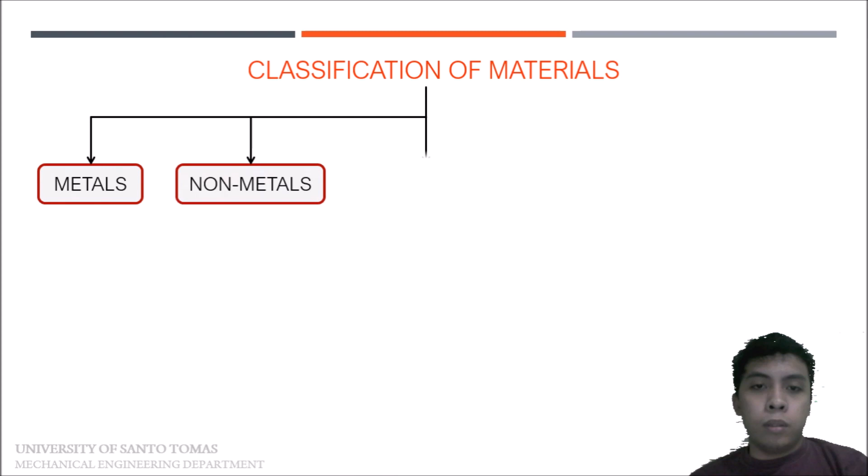So classification of materials. Classification of materials is categorized into five, which are metals, non-metals, ceramics, polymers, and composites. And the metal part is divided or classified into two, which are ferrous and non-ferrous metals. Polymers are categorized as well into three, which are thermoplastics, thermosets, and elastomers.

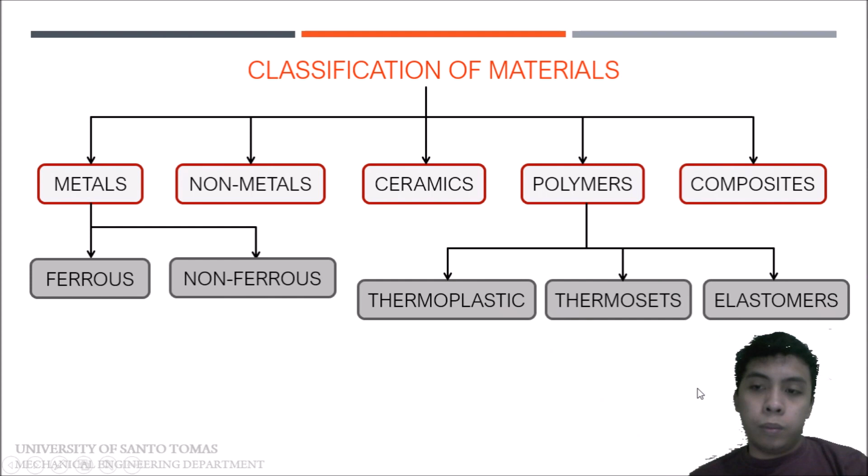Pag sinabi nating ferrous metals, it usually implies that iron is a large percentage of the elemental composition, which generally makes them vulnerable to rust when exposed to moisture. So kaya nga siya tinawag na ferrous kasi the majority element is Fe or iron.

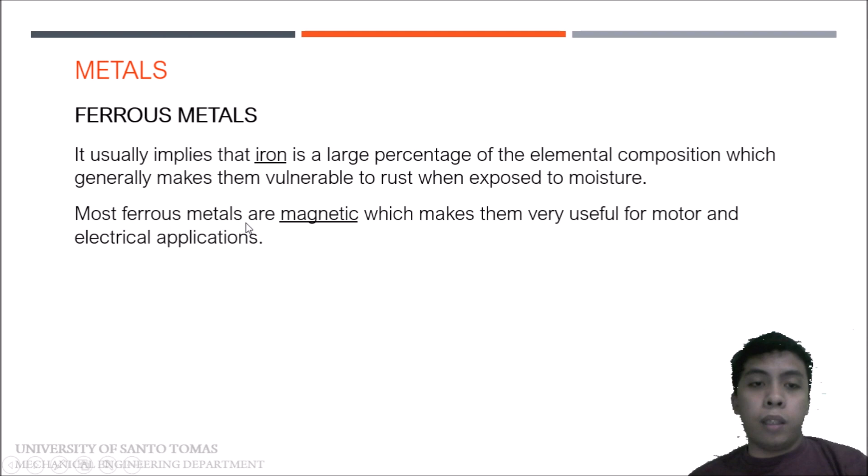So most ferrous metals are magnetic, which makes them very useful for motor and electrical applications. So examples of ferrous metals are alloy steel, stainless steel, cast iron, and wrought iron, all of which are ferrous metals. Majority ng compositions nila is iron.

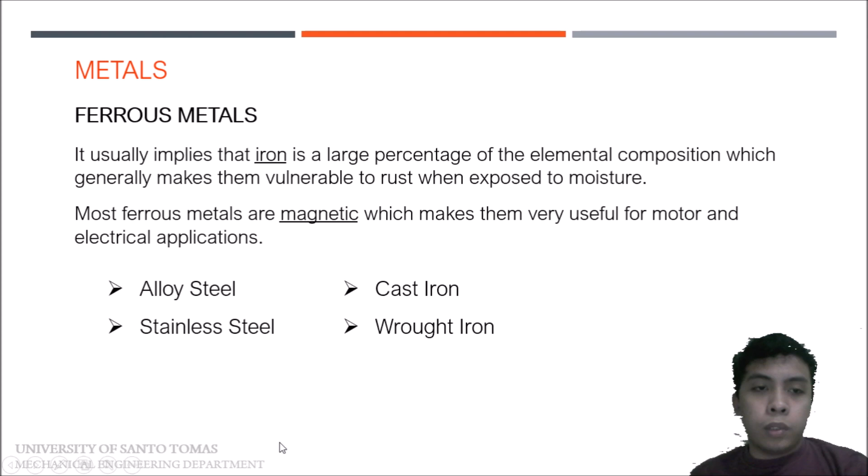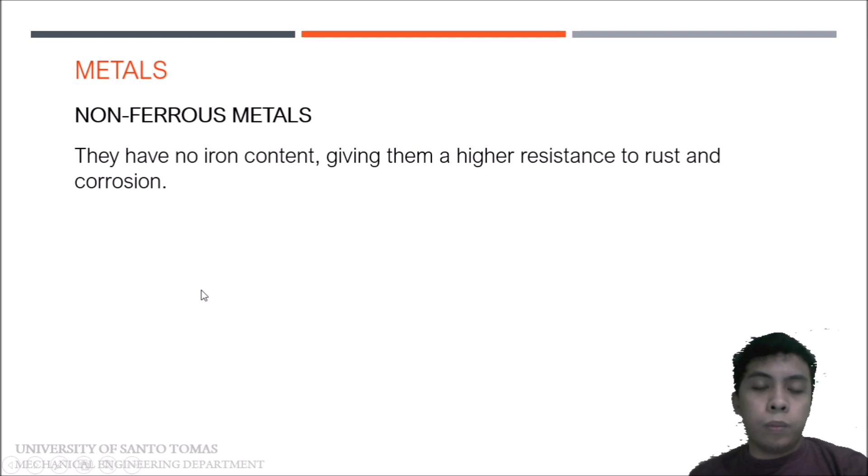Okay? Next, pag-usapan naman natin yung non-ferrous metal. Pag sinabing non-ferrous metal, they have no iron content, giving them a higher resistance to rust and corrosion. Lastly, they are non-magnetic, which is important for many electronic and wiring applications.

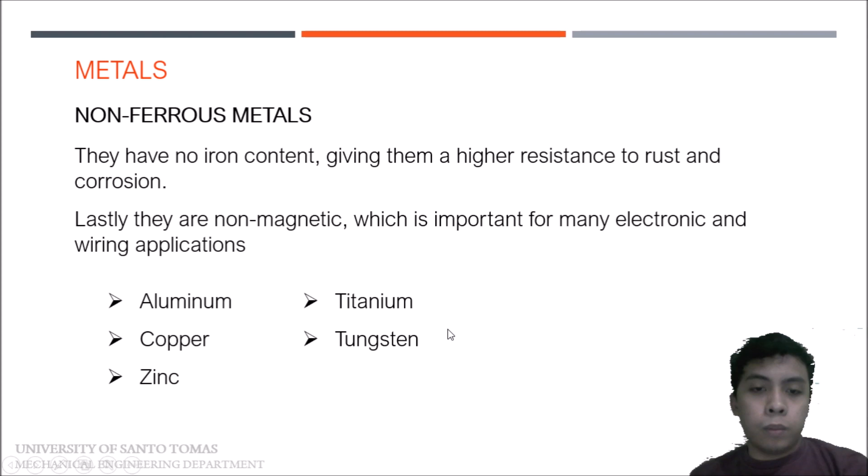So, the physical properties of metals are, first, they are good electrical and heat conductors. Lahat ng metal, mapa-ferrous or non-ferrous, they are good electrical and heat conductors. Second, they are malleable. Pag sinabi nating malleable, they can be hammered into thin sheets.

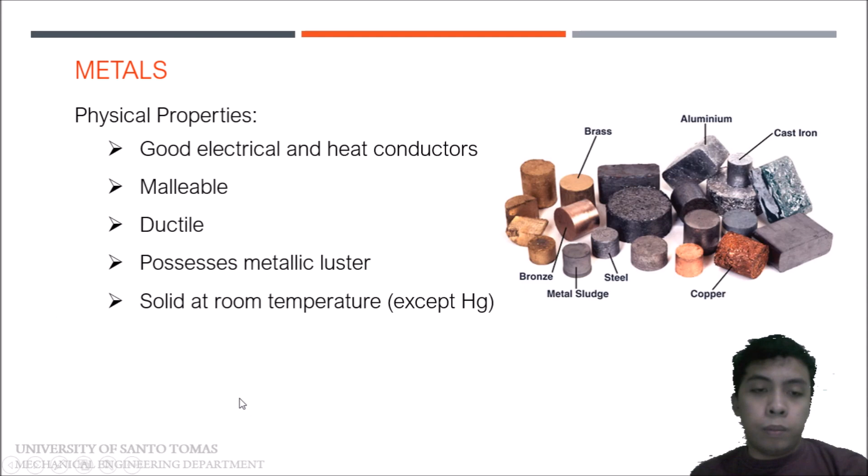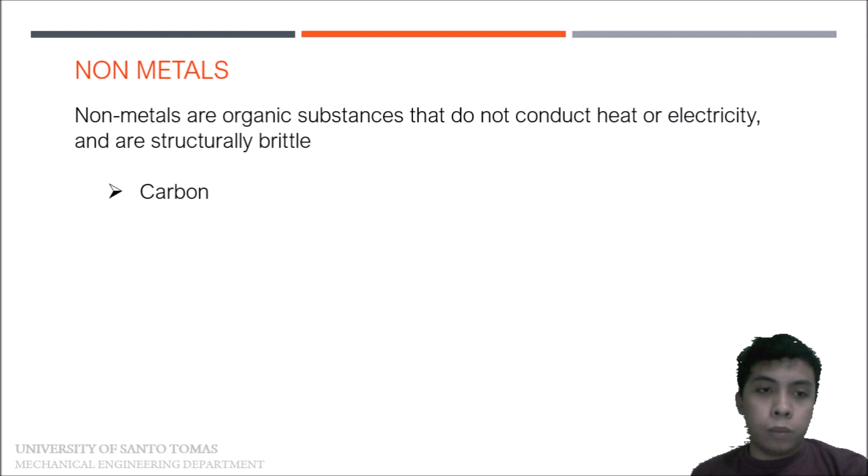For non-metals, they are substances that do not conduct heat or electricity and are structurally brittle. The first, very common example is carbon, nitrogen, oxygen, phosphorus, sulfur, and many more. Marami pa example ng non-metals.

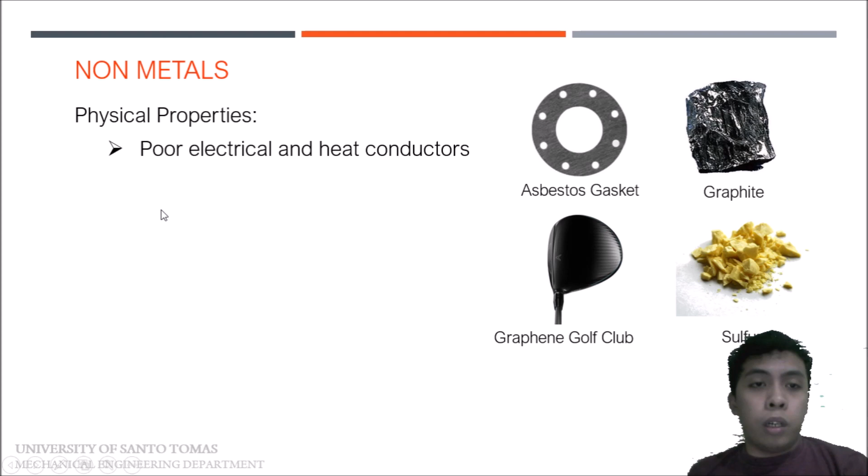So for the physical properties of nonmetals, nonmetals are poor electrical and heat conductors. They are also brittle. They are non-ductile. They don't possess metallic luster. And they may be solid, liquid, or gas at room temperature.

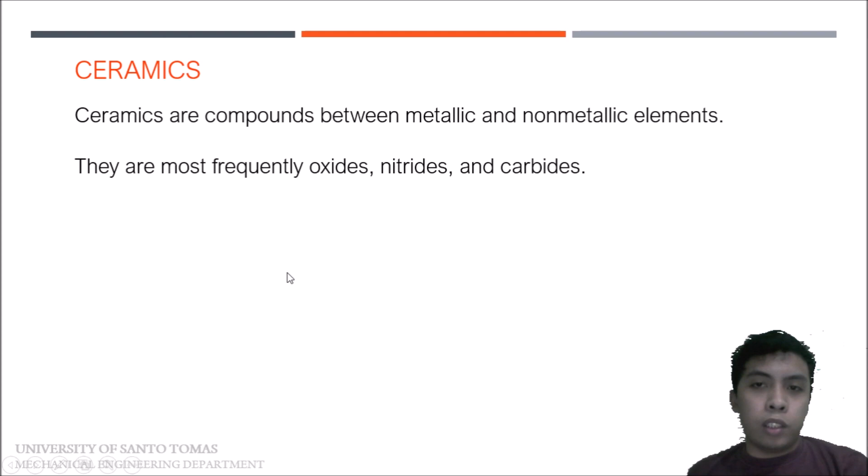So they are most frequently oxides, nitrides, and carbides. Nakikita natin bakit yan yung tatlong yan, no? Kasi karaniwan sa kanila is ganyan nga. So for example is aluminum oxide or alumina. Ito yung pinupurify into aluminum, no? It's a compound, ceramic compound. Another one is silicon dioxide or silica. Ginagamit to in glass making din. We have silicon carbide, porcelain, very common, no? We also have cement. Lastly, we have glass. So all of them are examples of ceramics.

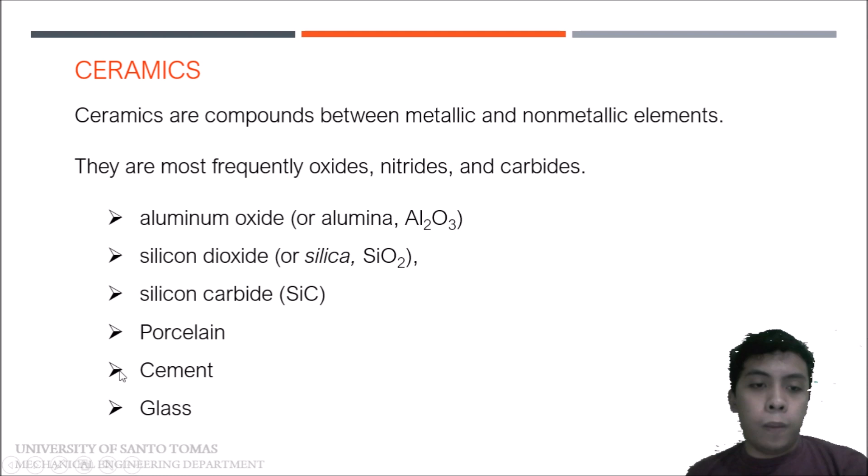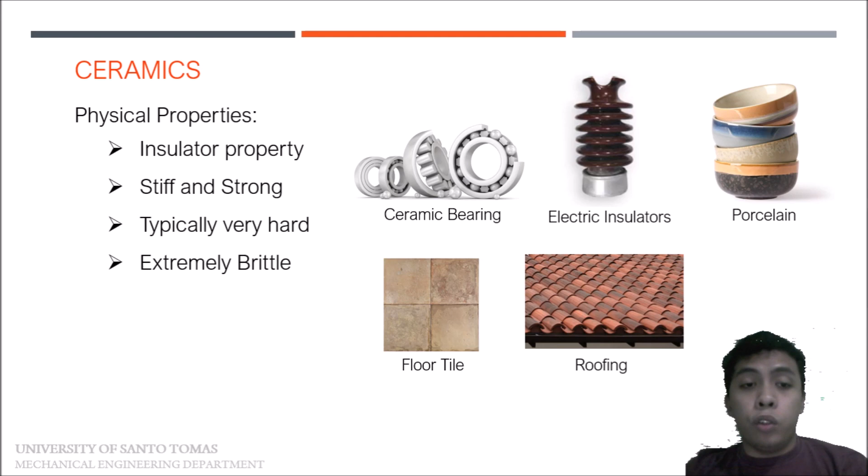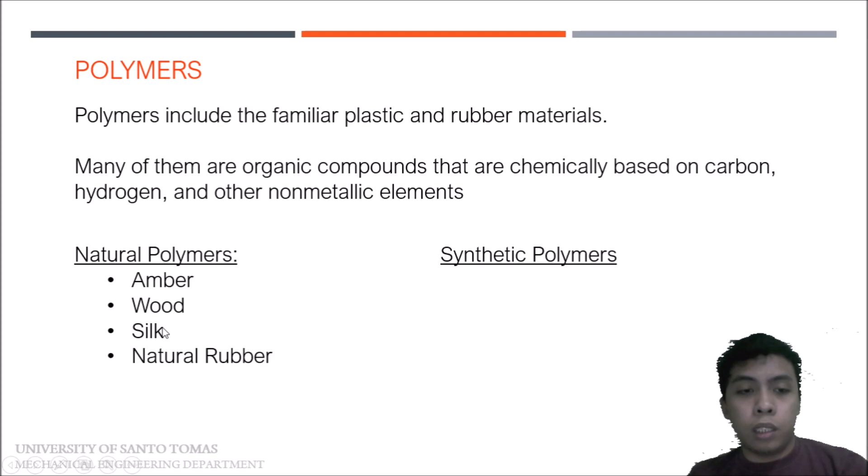So polymers are classified into two, which are natural polymers and synthetic polymers. So examples of natural polymers are amber, wood, silk, and natural rubber. Kaya siya tinawag na natural kasi natural occurring talaga sila. Yung amber, this is the resin, which is a byproduct of tree mula sa dagta ng puno. So that is amber. Wood from the tree, that is also considered as a natural polymer. Cellulose, no? Natural polymer yon. Next is silk na pinoproduce ng mga silkworms, considered as natural. And lastly will be the natural rubber, galing din sa dagta ng puno.

For synthetic polymers, ito yung mga example niyan. Bakelite, which is the first ever polymer. Nylon, ginagamit na thread, no? Ginagamit din natin siya as filament sa mga common 3D printers ngayon. Nylon din yun. Neoprene, polyvinyl chloride or PVC, and polystyrene.

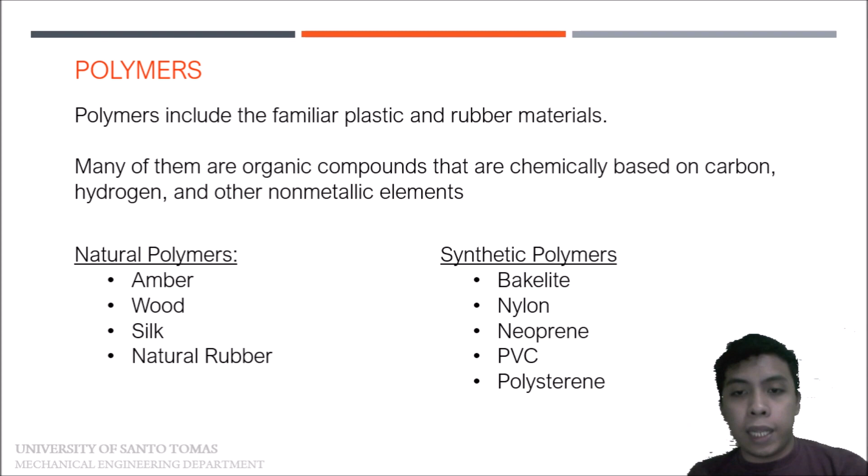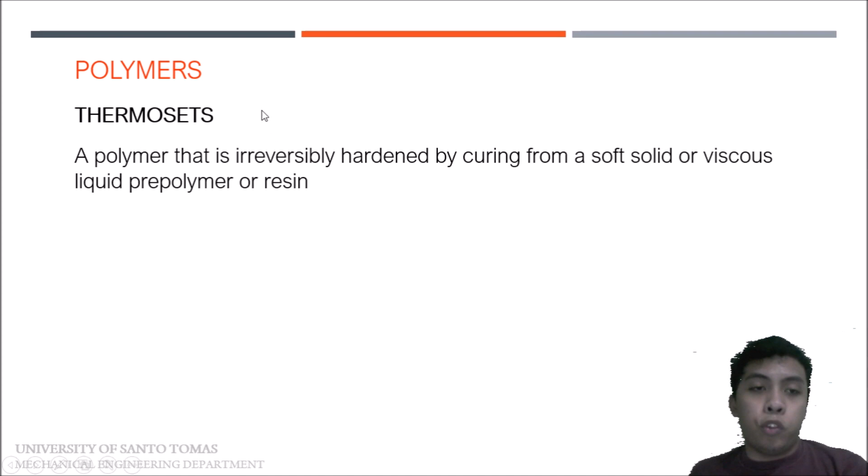One example of thermoset is bakelite. Bakelite is the first ever plastic or polymer that was ever made. It was discovered in 1907 and patented in 1909. So its common usage is just like common plastic, ginamit siya as kitchenwares.

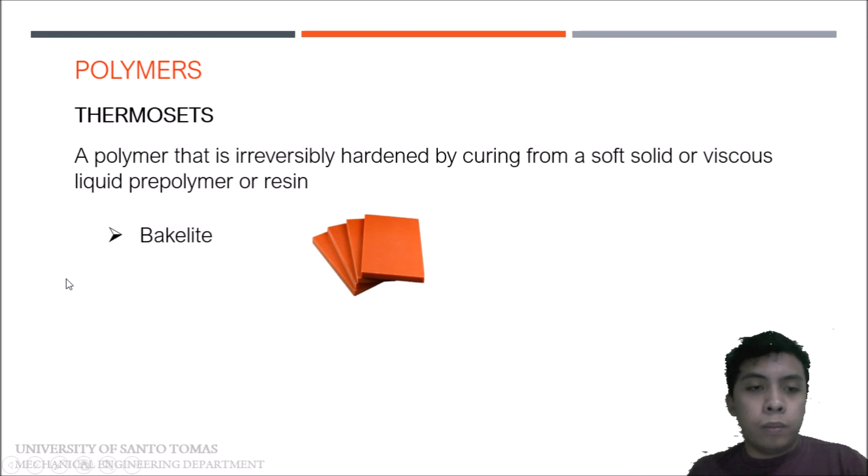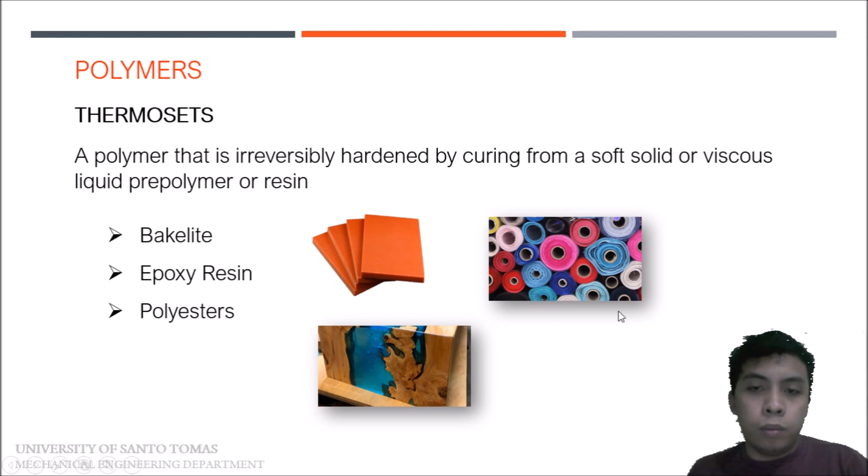Okay? Next example is epoxy resin. Next is polyesters. Example niya itong thread na yan, that is polyester thread. And polyurethane. Polyurethane, usually ginagamit siya as varnish, no? Marami rin yung usage.

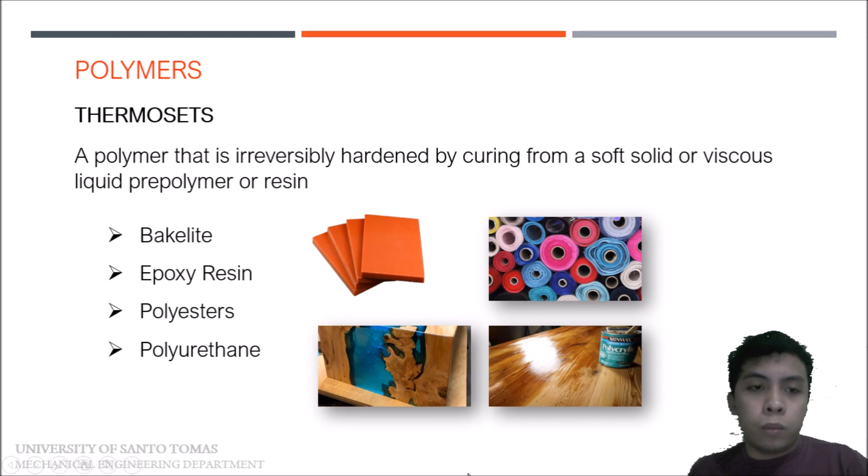Next, let's talk about thermoplastics. Thermoplastics, it is a polymer material that becomes pliable or moldable at a certain elevated temperature and solidifies upon cooling. The difference between thermoplastics and thermosets, kasi kagaya nabanggit ko sa thermosets, permanent na yon.

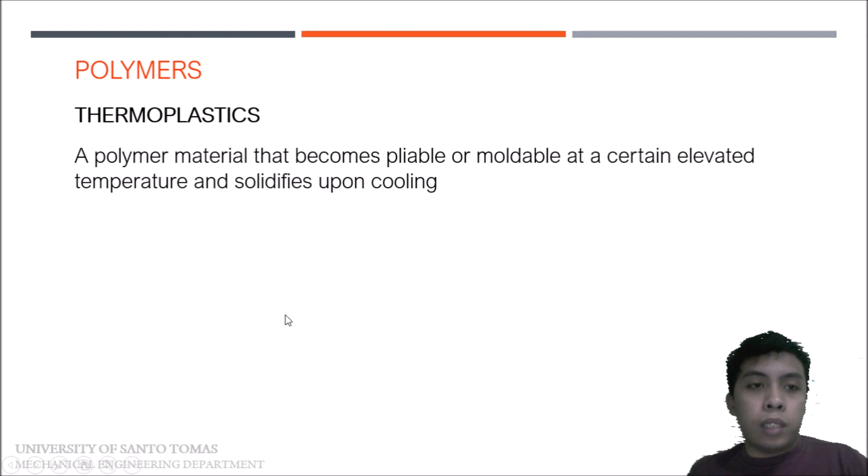So that is thermoplastics. Examples of thermoplastics are PET or polyethylene terephthalate, which is a common material for plastic bottles. Next is polypropylene or PP, used as material for bottle caps. Next is polyvinyl chloride or PVC, used in piping systems. And we have LDPE and HDPE, usually used in containers.

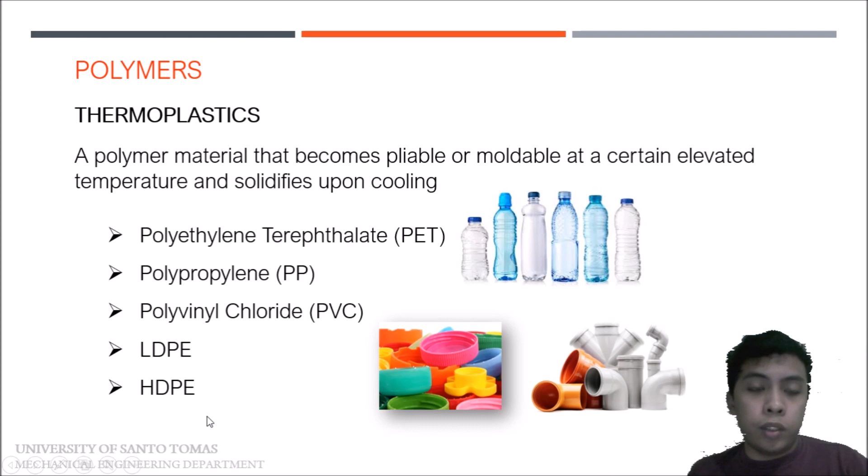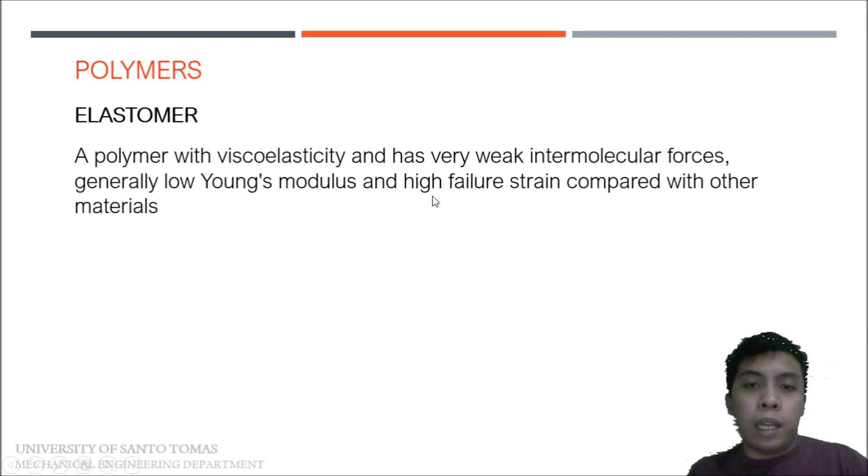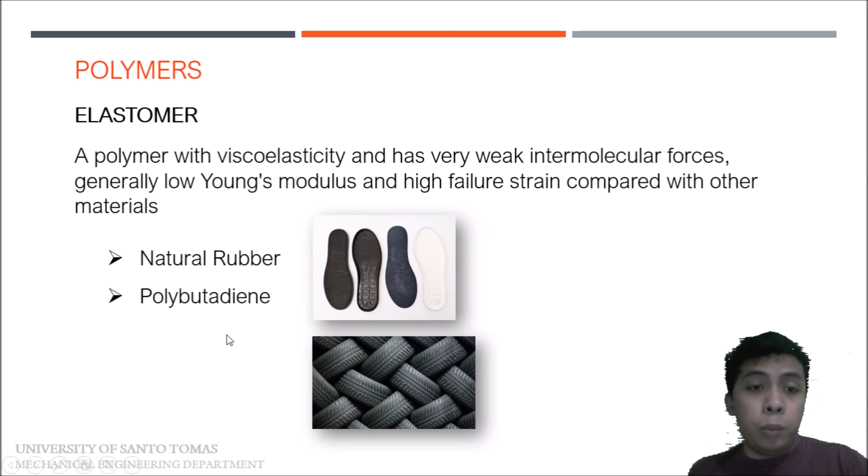Lastly, elastomers. Elastomers is a polymer with viscoelasticity and has very weak intermolecular forces, generally low Young's modulus and high failure strain compared with other materials. So an example is natural rubber, which is ginagamit usually sa mga swelas ng sapatos o tsinelas. Next is polybutadiene. It is commonly used in wheel fabrication. Synthetic rubbers to.

Next, we have neoprene, another synthetic rubber. Ginagamit siya as material sa pang-swimming, no? Kaya elastic siya, kasi synthetic rubber siya. Another one will be silicone.

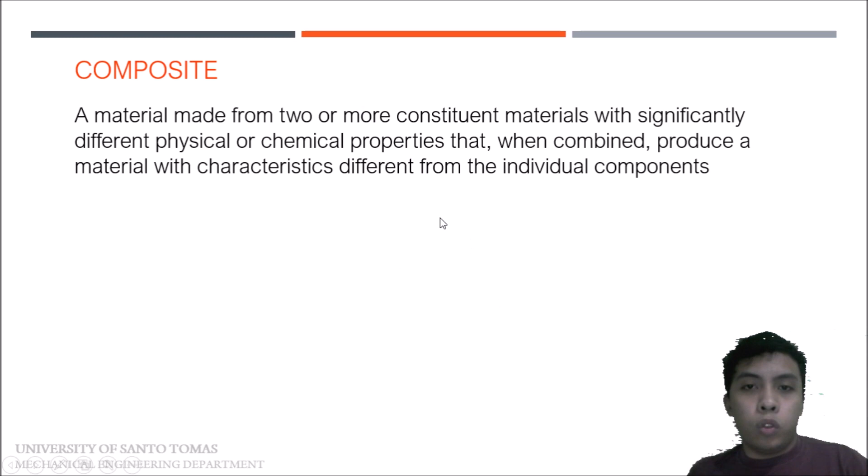Next, let's talk about composites. Composites is a material made from two or more constituent materials with significantly different physical or chemical properties that, when combined, produce a material with characteristics different from the individual components. So, ano daw siya? Combination of two or more materials. Example niyan is reinforced concrete. It is a combination of concrete and other materials such as plastics, no? So that is considered as composite.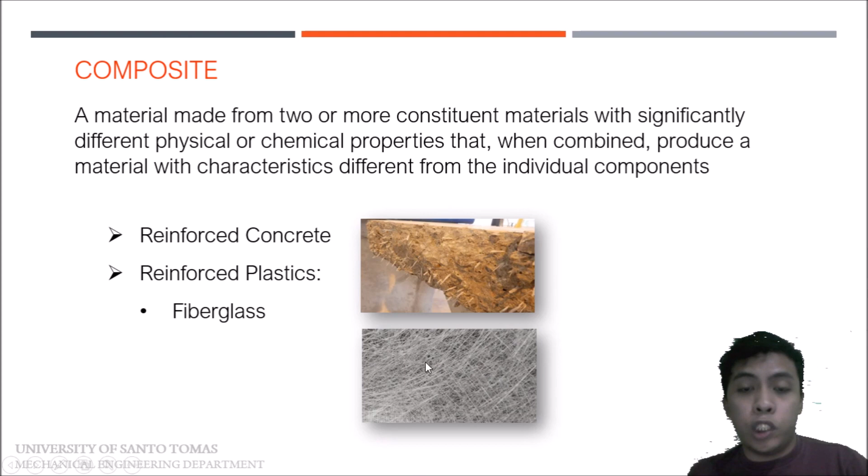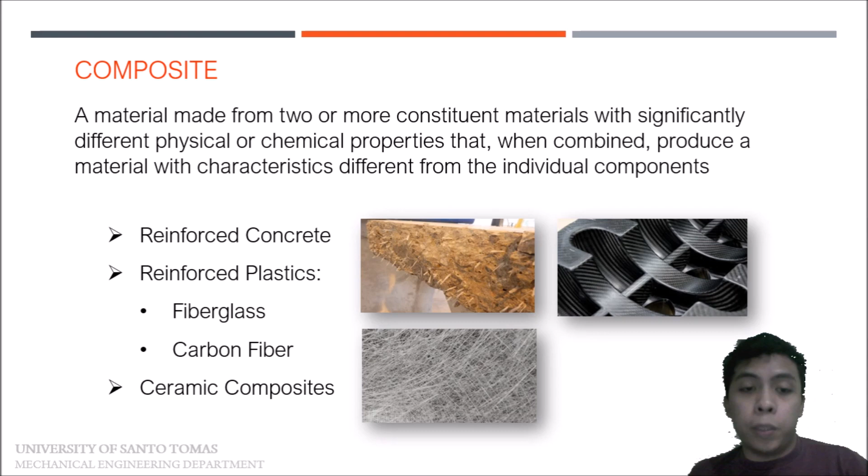Another one is reinforced plastics. Ano ba yung mga reinforced plastics? First, we have fiberglass. Fiberglass is considered a composite kasi combination niya ng glass fiber, which is another material, and a resin. Another one is carbon fiber, a different material combined with another resin. Another example will be ceramic composites, which are combinations of different ceramics.

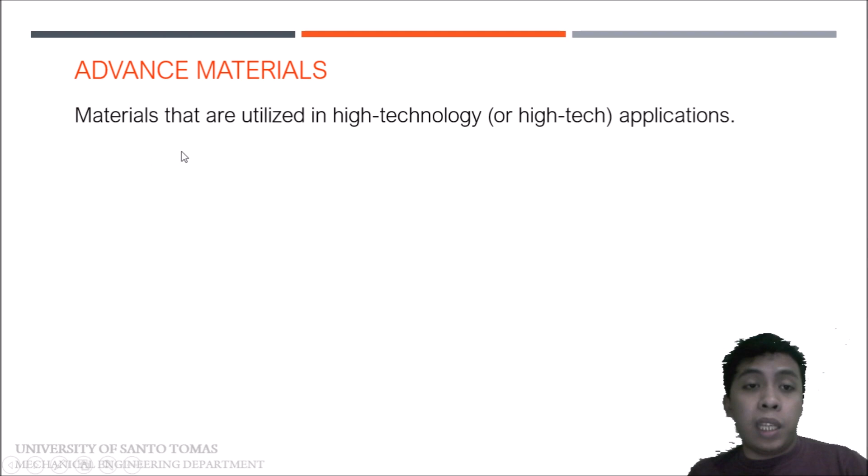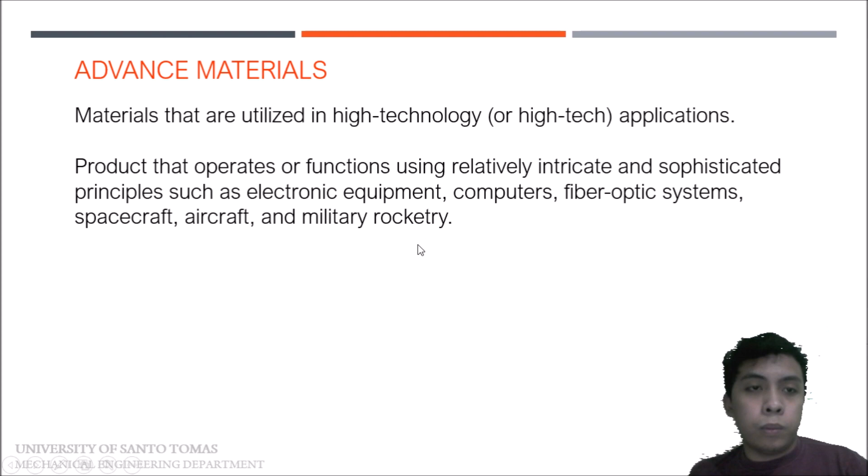So what are those advanced materials, or what is the definition of advanced materials? Advanced materials are materials that are utilized in high technology applications. So products that operate or function using relatively intricate and sophisticated principles such as electronic equipment, computers, fiber optic systems, spacecrafts, aircrafts, and military rocketry. So yun yung usually usage niya. So the first example is semiconductors.

Semiconductors, that is an example of advanced material. Kasi hindi mo siya makaka-classify dun sa una kong limang nabanggit, no? Pero this is a common material na ginagamit natin lalo na sa gadget. Semiconductors are especially important as varying conditions like temperatures and impurity can easily change their conductivity. So the combination of various semiconductor types together generates devices with special electrical properties which allows control of electrical signals. That's why they are very crucial in terms of the fabrication of gadgets. So example yan ng advanced material.

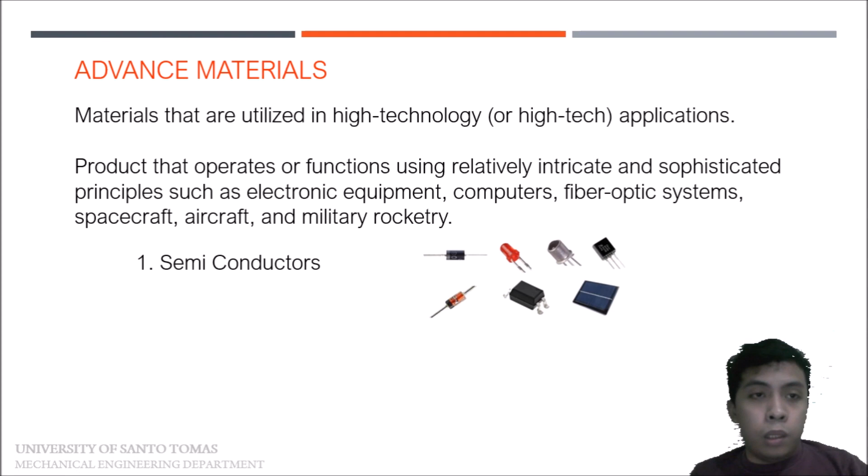And next will be the fillings kapag nagpapapasta tayo. There are two kinds of filling: amalgam filling, and amalgam is a combination of silver and mercury. And then we have composite filling, which is yung common na today, kasi puti sila, no? Another example of a biomaterial will be the nitinol stent in arteries. Ginagamit to kapag nagbabara yung puso. It is a special type of material which automatically expands para hindi magbara yung daluyan ng dugo. So this is an example of biomaterial.

So in terms of choosing or designing biomaterials, it is very crucial to take care sa pagpili, kasi very crucial yung tinatawag nating biocompatibility. Kasi kapag hindi compatible yung material na gagamitin natin with the body, hindi tatanggapin ng body yung material. So mangyayari, hindi niya masaserve yung purpose, mapapahamak pa yung tao.

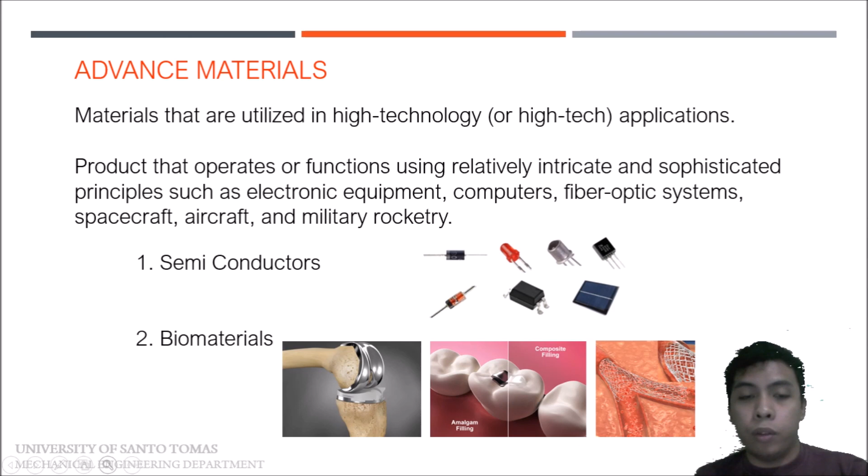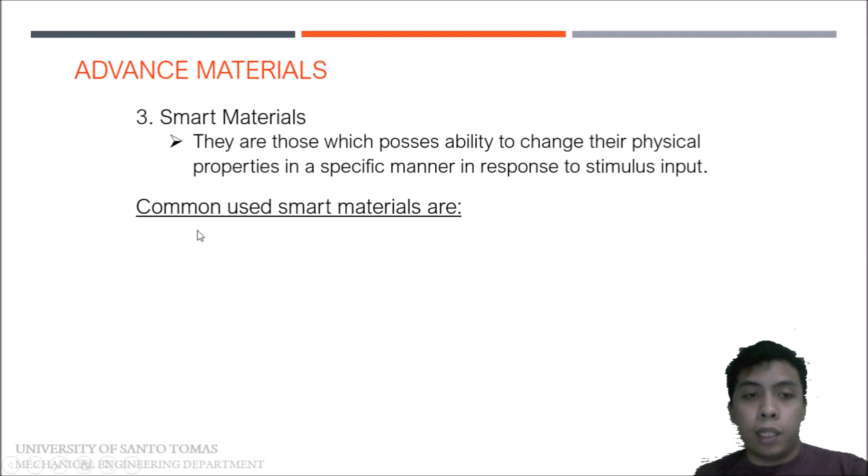Next type of advanced material will be the smart materials. So ano ba yung tinatawag nating smart materials? Smart materials are those which possess the ability to change their physical properties in a specific manner in response to stimulus input. Ano ba yung mga common na smart materials? First, we have piezoelectric. Di ko alam kung common na sa inyo to or narinig nyo na siya. A piezoelectric material generates an electrical charge in response to applied mechanical stress and vice versa. So kapag nag-apply ka ng force, nagpo-produce si piezoelectric material ng charges which generates electricity.